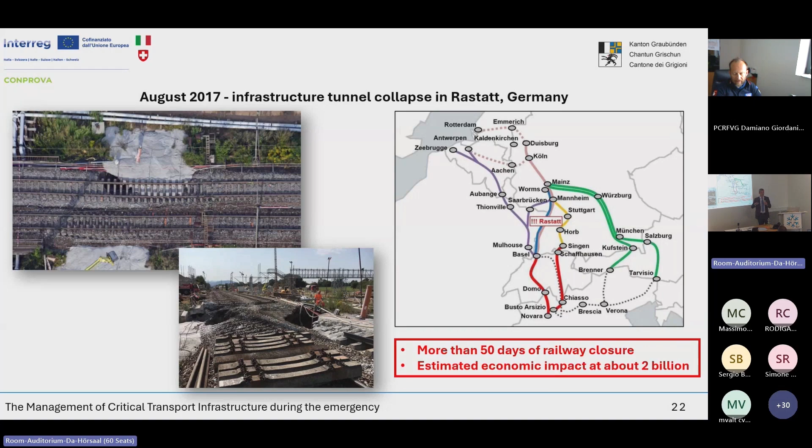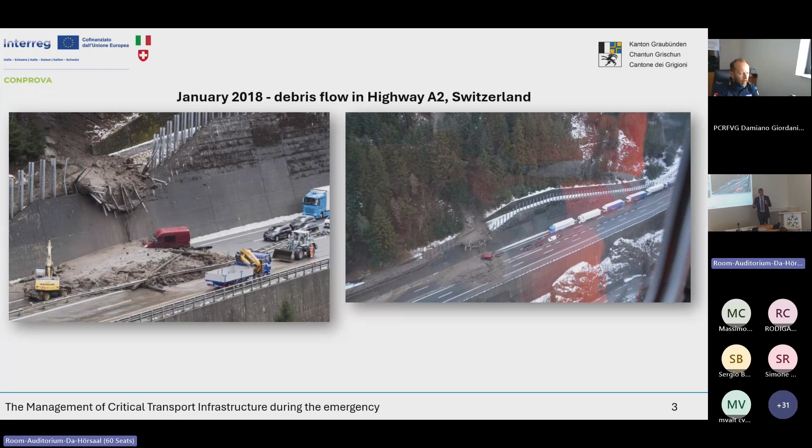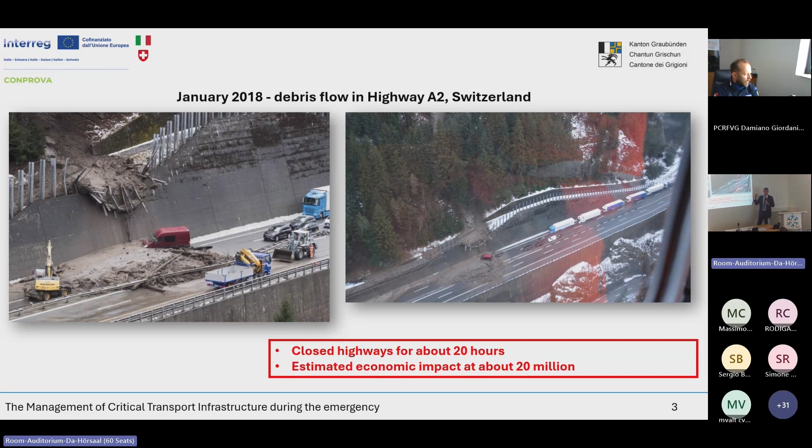Then we have another event that happened in Switzerland, not in Canton Grigioni, but on the A2, which is the backbone of Switzerland. A debris flow happened on the highway, and also in this case the consequences are not limited to the section where the event occurred. The highway was closed for more or less 20 hours, but we had larger social impacts amounting to about 20 million, just to manage mobility in the zone.

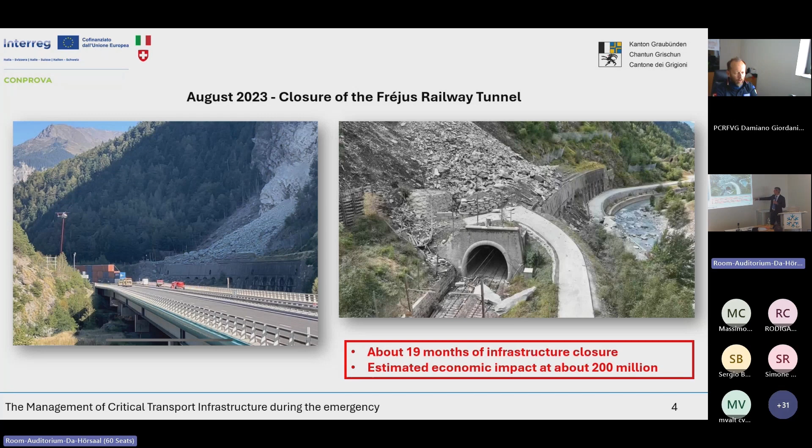We have another event that happened in 2023 regarding the Fréjus railway tunnel, which you can see in the image. Also in this case, this is an important corridor between Italy and France. The closure was more or less 19 months, and if we consider the economic effects between the two countries, they amount to about 200 million. The last example is again in Switzerland, regarding the Gotthard Base Tunnel.

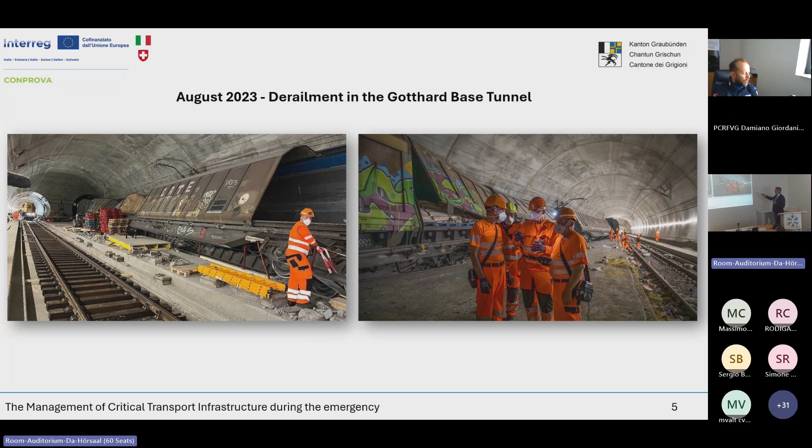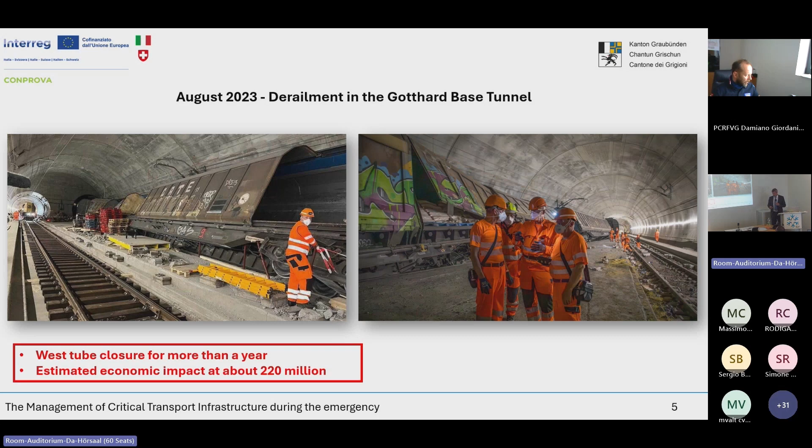After a derailment of the train, there was closure of the west tube for more than a year. So not only natural events - this is a non-natural, man-made, anthropic event. But also in this case, the Gotthard Tunnel represents a very important corridor in Europe for passenger and freight transport, and you can see the impact was about 220 million. So this is just an example to understand how important it is to study the possible effects linked and related to transportation infrastructure.

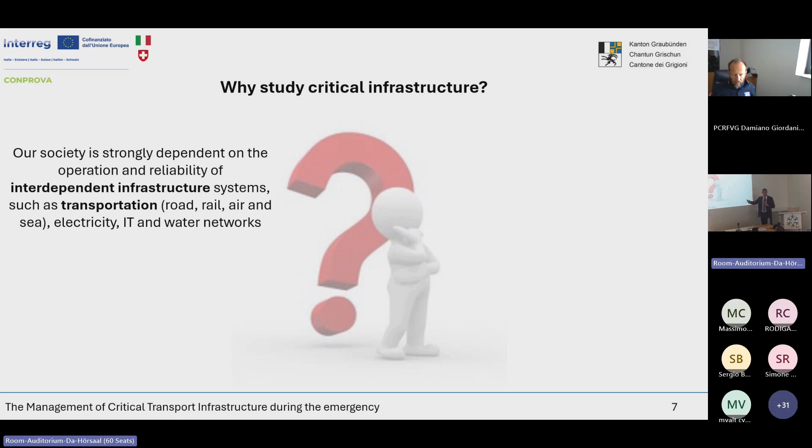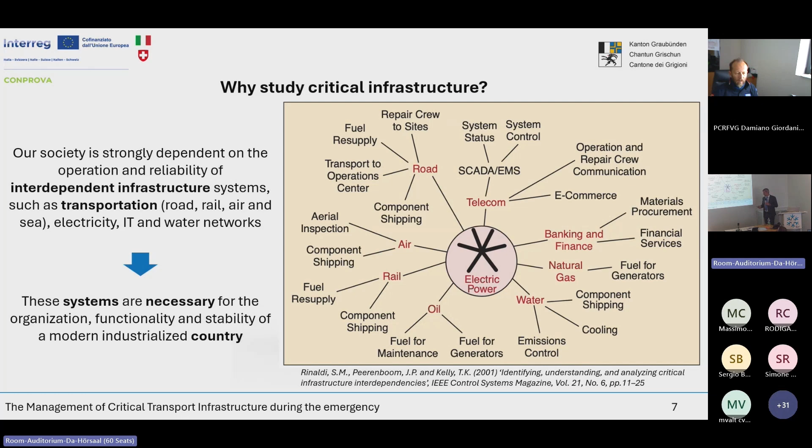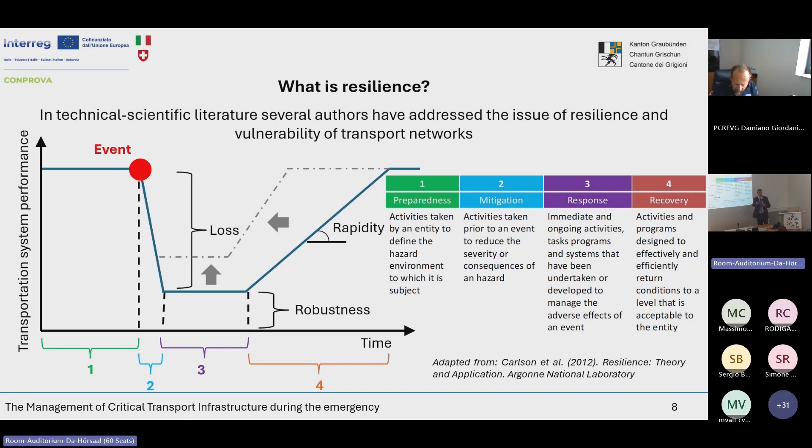Just 4 questions to understand what is behind resilience and emergency management. First of all, what can happen when a relevant event occurs in a given area? What are the socioeconomic impacts or effects, taking into account the events I presented before? Who manages a relevant event? And finally, what could happen if we are talking about a cross-border area?

Now it's important to underline that in this case, we need a decision support tool, instruments that can support the decision-making process in order to manage the transportation system in an easy way.

So the first question: we have, for instance, the activation of first responders, firefighters, sanitary rescuers, and so on, operators and managers like ANAS, agencies, institutions, prefectures, civil protection - it depends, but there are a lot of stakeholders involved. Implementation of plans and procedures that must be activated, taking into account the specific event, because each plan, each procedure is referred to a specific event.

And then we have to manage the mobility and transportation system, not only in the place where the event occurred, but also in a wider area, just to ensure, just to grant the mobility of goods, for instance.

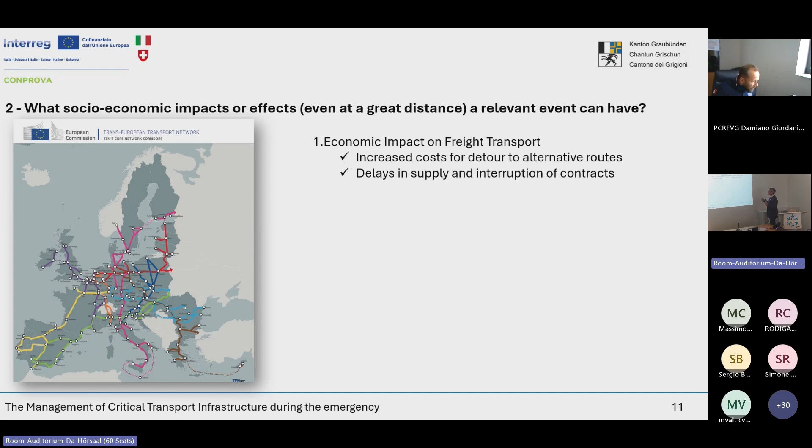Take into account, for instance, freight transport, the detour to alternative routes, delay in the supply chain, and so on. Also effects to passengers, travel time, alternative lines and routes if available. It depends on the situation, it depends on the topology of our network, obviously.

Environmental impacts, increased road traffic, for instance, increased CO2 emission or air pollution, depending on the link or the section that is disrupted. And then we have also indirect costs that are not easy to evaluate because it's not easy to monetize these costs.

But you can see that we have, for instance, impacts on local tourism, increasing accidents due to alternative routes, and so on. So all these impacts are very important when we have to consider that there is an event here, but the consequences are not only related to the place where the event occurred, but also to a wider area, as I said before.

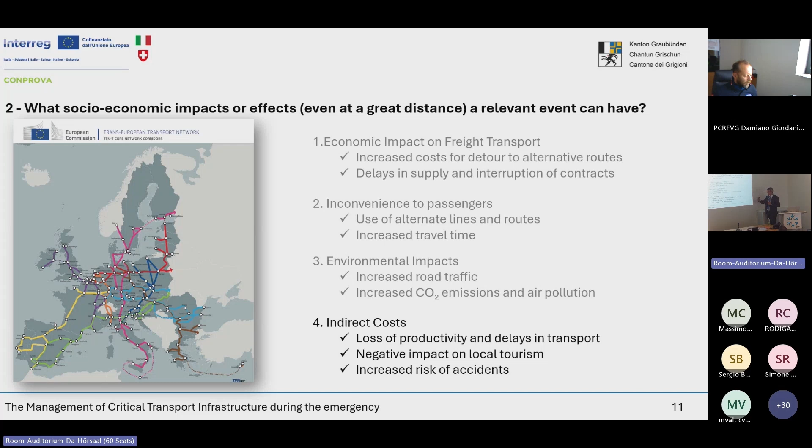What are the subjects, what are the stakeholders involved? We have, for instance, firefighters, first responders, sanitary experts, police, and so on. We have agencies, institutions, operators, managers, and so on. And it's very important, the relationship among all the subjects involved.

Because, okay, we have to speak the same language, Italian, English, whatever you want, but we have to have in mind a clear idea about the activation of the procedures.

And finally, the last one: if we are working in a cross-border area, we have many stakeholders involved, as we said before, obviously, but in some cases we have different rules and processes due to the 2 or 3 countries involved. It depends on the configuration of the system under investigation.

Then we have prolonged impacts and effects on the 2 or 3 countries, as we said before, in a wider area. And the point is, we want to try to merge and share resources just to reduce the intervention time and to improve and increase the possibility to reduce the effect. So we want to put all the resources on the table and work together to cope with the event.

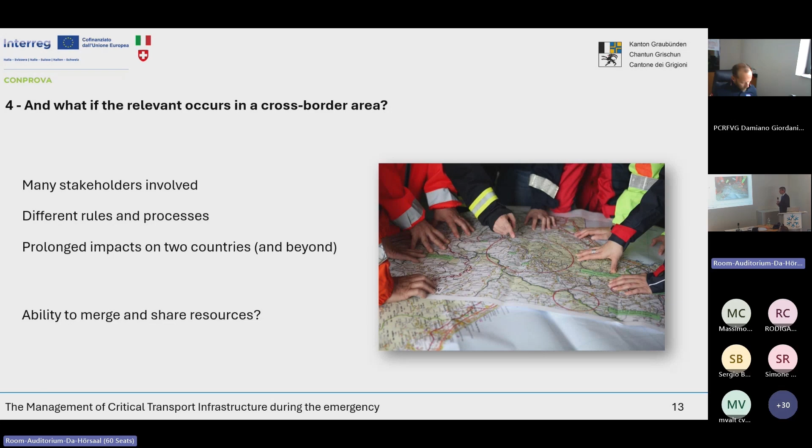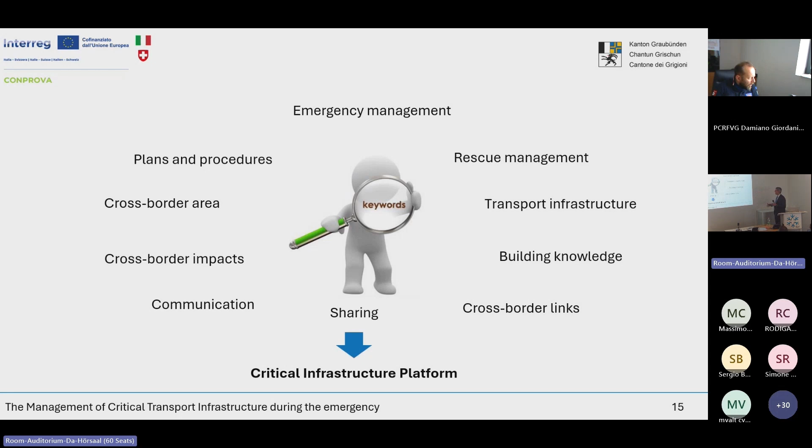We can say something about the possible solution in terms of tools, the useful and suitable tool that can be used to manage an event. The critical infrastructure platform can be a possible tool. In this slide you can see some keywords I mentioned before, just to understand what we mean when we talk about resilience, emergency management, transportation, effects, impact, and so on. The idea is that all these keywords can be put inside a critical infrastructure platform.

The platform comes from the previous Interreg project, the resilience of cross-border critical infrastructure. That was a project between Regione Lombardia and Canton Ticino, the north of Regione Lombardia and the south of Canton Ticino. The partners involved were Regione Lombardia, Polizia Cantonale, Dipartimento del Territorio, Politecnico di Milano, and SUPSI.

The project ended more or less one year ago, and you can see the main important data of the project. So what is the heritage of this project? We want to take the platform that is already in operation, and we want to boost and improve it, taking into account the specific needs within the CONPROVA project.

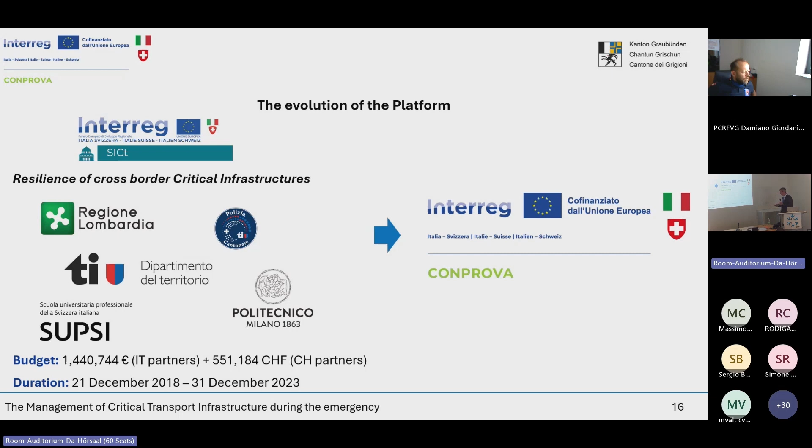So in this way we start from what we have done in the previous project, and then we will improve some specific tools. This is the platform that is already in operation, then you can try to assess and so on. For instance, we are now upgrading the transportation network - you can see here the SICt project road network in gray.

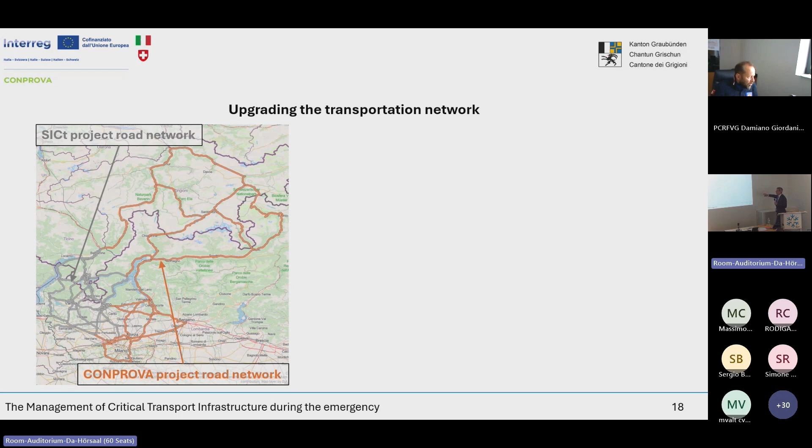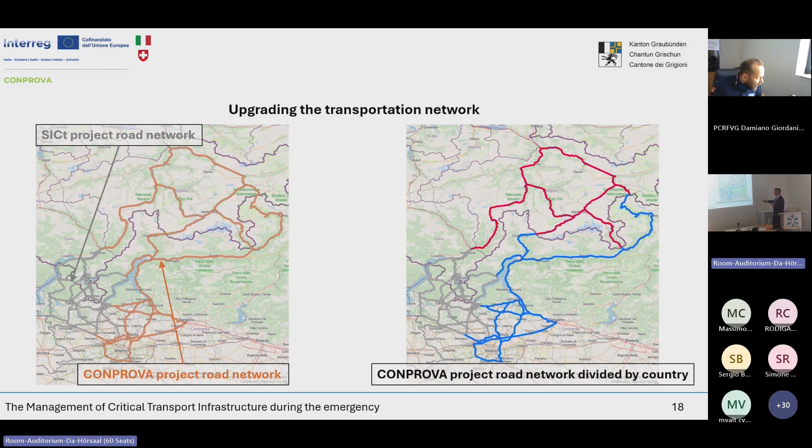The same approach will be used also for rail transportation. Now we are starting by upgrading the road transport, and then we will upgrade the rail transportation as well.

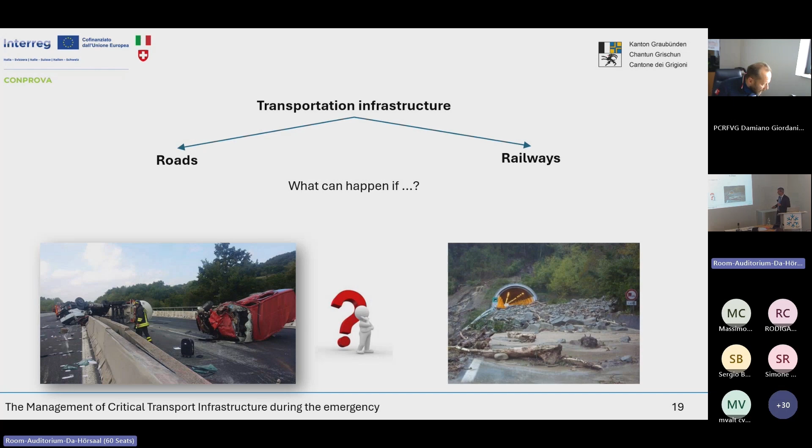What about transportation infrastructure? As I said before, we have to consider road transport and rail transport. The point is what can happen - what are the possible consequences after a big event, after a major event. We can consider on one end events caused by the transport system itself, in which the source of risk is within the transport system - road accidents, rail accidents, dangerous goods transport, for instance.

And on the other side, events in which the source is external to the transportation system, such as natural hazard, that we discussed before. But the effects are also within the transportation system itself.

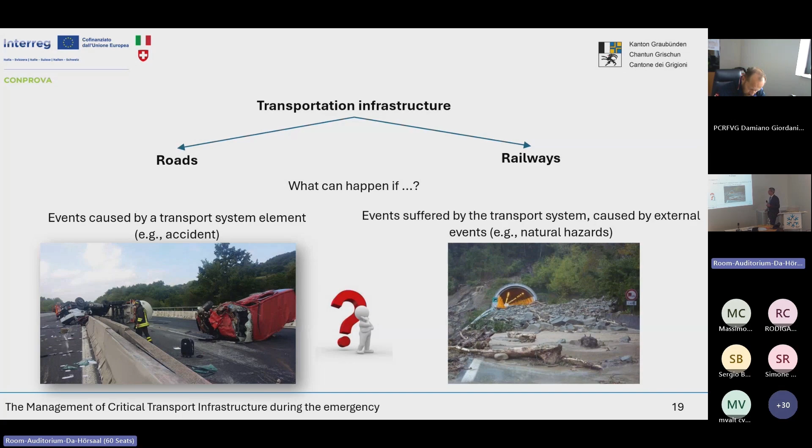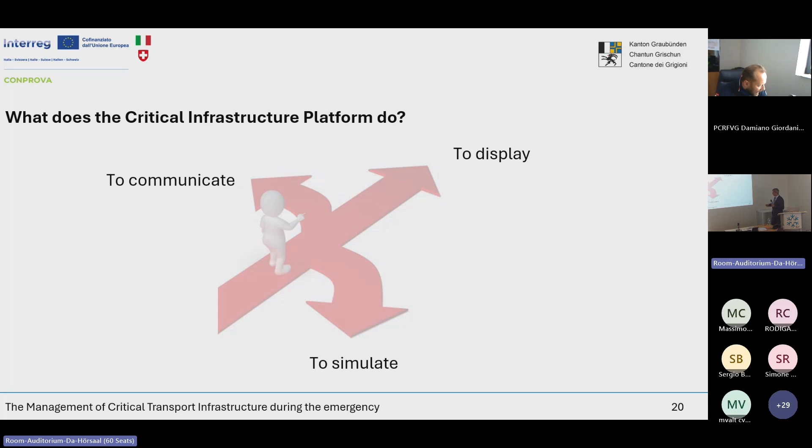I want to underline an important issue behind the platform: it is a starting point, meaning it's not a static platform, but always in evolution, because we want to satisfy the specific needs that will arise from stakeholders. So the idea is, now we have specific resources and time to develop the platform, but in the future it will also be developed by taking into account specific needs.

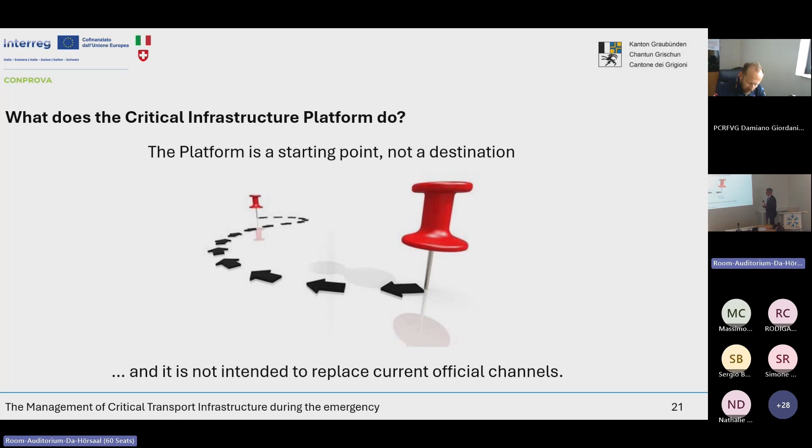We don't want to replace the current and official channels within each stakeholder. So firefighters will use specific channels, police will use specific channels, but the critical infrastructure platform can merge all these channels and try to make communication easier than using the phone or other tools.

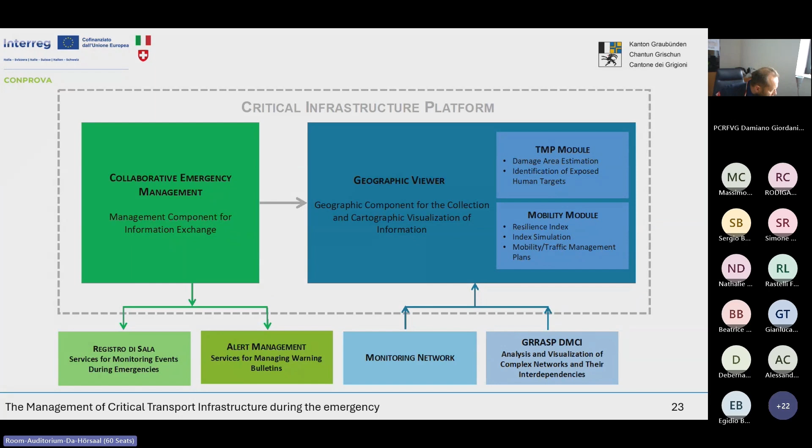The two modules are already in operation, and you can see some examples in terms of cameras, monitoring network, alerts, and so on.

We can see something about the collaborative emergency management, in which we have, for instance, the alerts. We have a specific tool that can support the management of alerts, so the user can put in some data, and this data will be shared with other subjects.

Then we have the events, in which there is an emergency that can affect a critical infrastructure, a transportation infrastructure, road or rail. We have to put in some information about what happens, and this information will be shared among the subjects involved in the situation - first responders, operators, prefectures, civil protection, and so on.

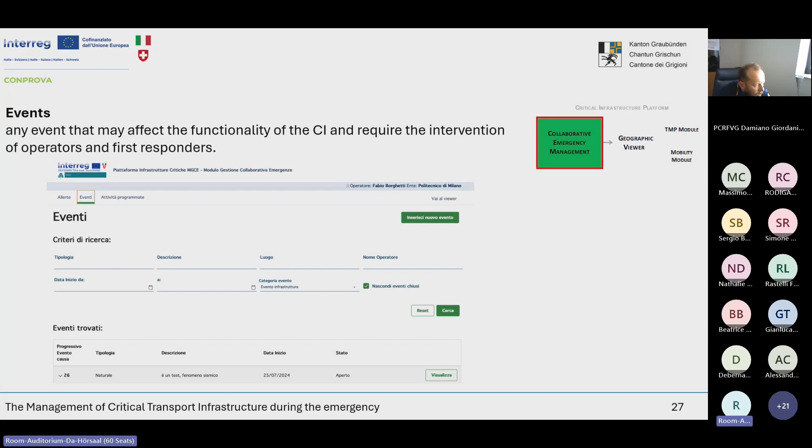Then we have, for instance, scheduled activities, in which there is no emergency situation, but for instance I have to close a road section or a tunnel for maintenance.

So it's important to understand this information before the event, just to organize alternative routes. For instance, this part was very, very important in the previous project, in which there was the border between Italy and Switzerland. When the border was closed, for several reasons, it's important to have an idea when the border is closed, because Italy must manage the traffic and also Switzerland must manage the traffic. Italy must manage the traffic starting from the south of Lombardy region, and Switzerland must manage the traffic starting from Zurich node.

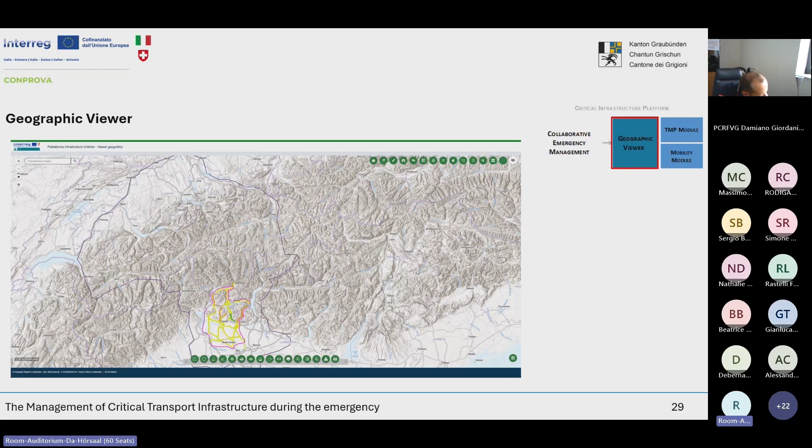Okay, so in this way, the border between Italy and Switzerland is very important, also if there is no emergency situation. Then we have the geographic viewer, in which we have a lot of possible tools, and in particular, we have two bars. In the lower part, we have a bar that is suitable to show something. So there are specific widgets that can help the user to show something, starting from the camera, alerts, maps, and so on, that are in the platform.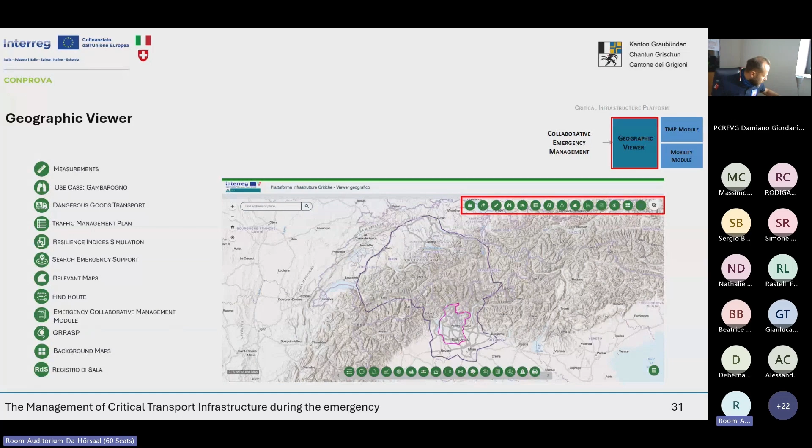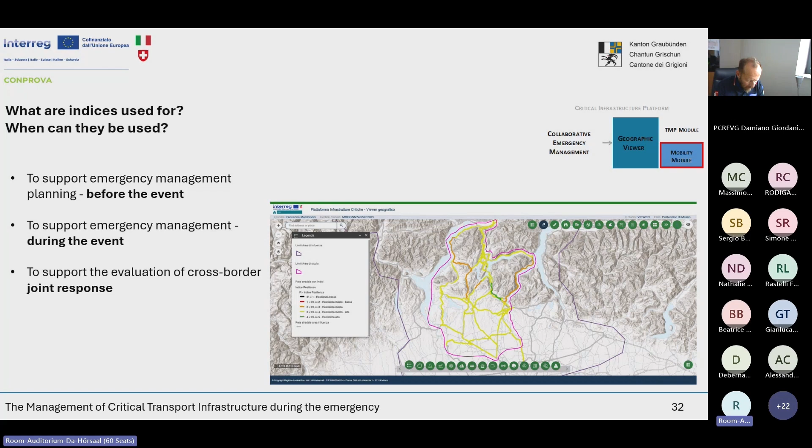And then in the upper part, there is another bar with other tools that are able to simulate something. So with these tools, the user can simulate something on the network and understand the behavior of the road and rail network during an event. We calculated also specific resilience indices on the rail and the road network, just to understand the behavior of the network during an event, and in particular before and during the joint response of the event. We can see how these indices are calculated, but I think we have not enough time now to make a deeper analysis, but if you are interested, maybe I can explain later.

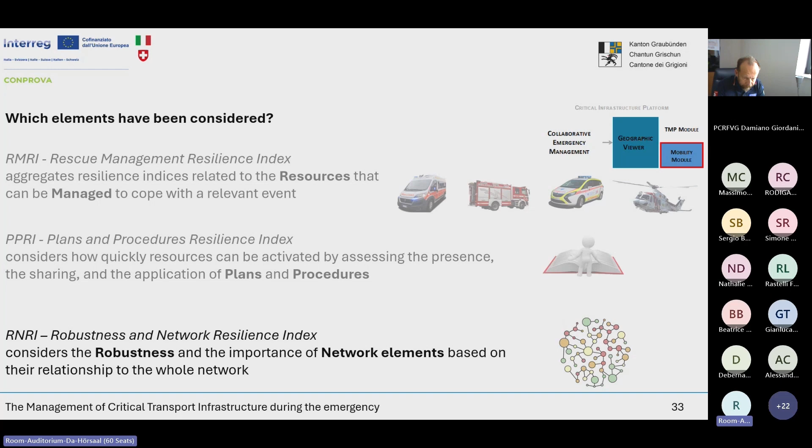We mapped also the possible resources that can be activated during an emergency, starting from the procedures and plans that I said before. So there is a map, and the map can be activated by the user just to understand where these resources are located and to estimate the intervention time when there is a big event on the map.

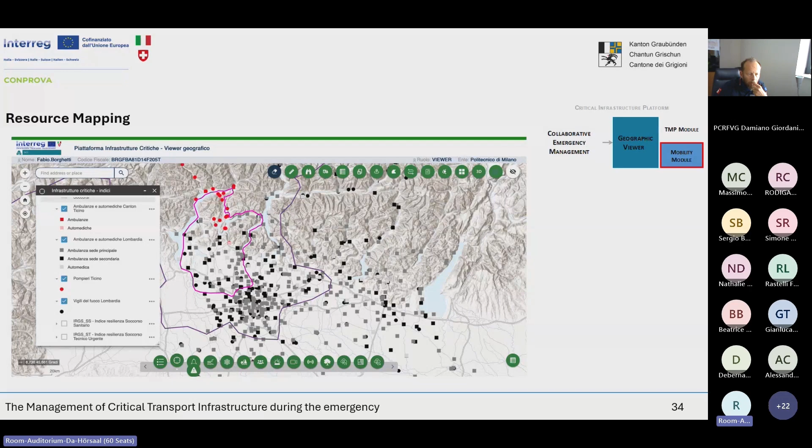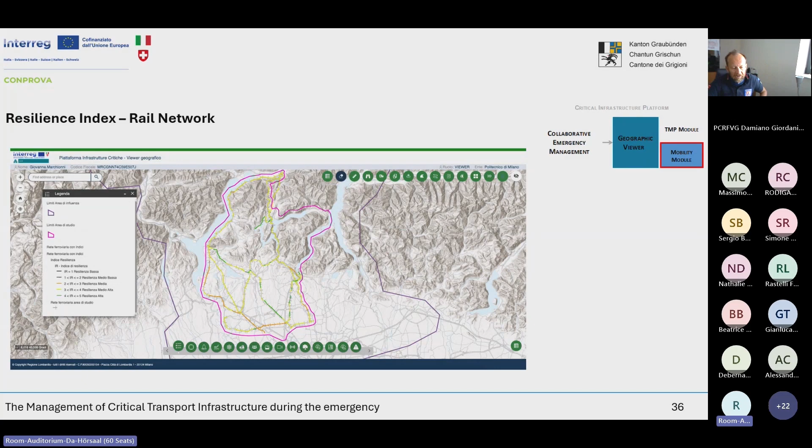Here there is a typical output of the indices. It is an index related to the road network. We used colors in which green represents a good situation. Then we have yellow, orange, red, and dark with the bad situation in terms of resilience. And then the same approach was done also for rail transportation, in which we use the same colors to classify the network. Then there is another important tool that can be useful to manage the mobility of passenger and freight transport during an emergency.

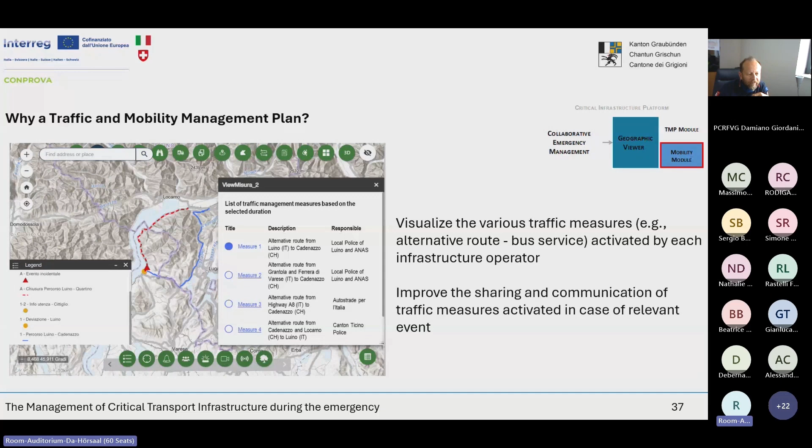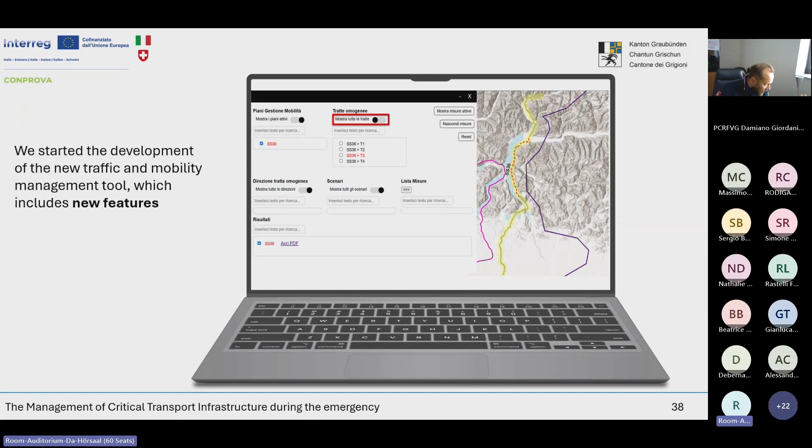And you can see that there are a lot of possibilities for the user to switch on, switch off alternative routes, and then the user can see what the alternative routes are in case of a disruption of road sections or rail sections. And this can be useful also to share the information with the other subjects involved when there is a disruption in a specific route. And now we are going on with this tool, and we are improving this tool, adding new features. So it's important also to consider the new specific needs within the CONPROVA project.

There is a last tool that is referred to dangerous goods transport. It is a typical event that can affect the transportation system. It is a man-made event, but generally it is a typical event because it requires more time to be solved. And it means that the closure of the infrastructure, road or rail infrastructure, will be prolonged over time. So the tool is able to make some evaluation in terms of the possible damage area, taking into account the scenario. And in particular, the tool allows to evaluate what are the possible targets within the area.

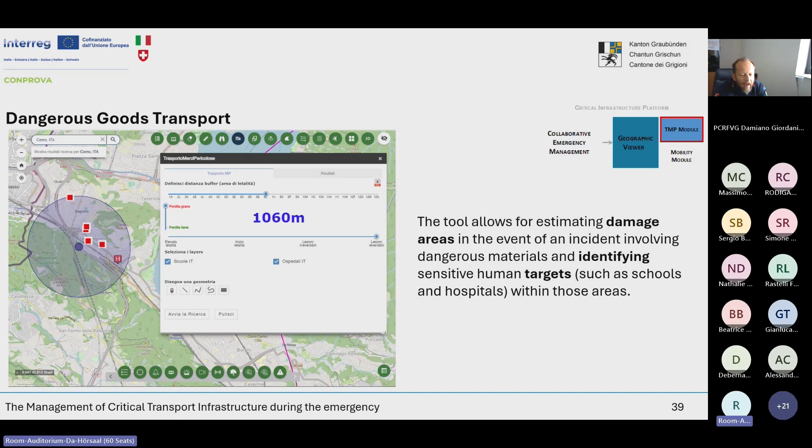For instance, schools, hospitals, commercial centers, and so on, and how to reach this area for the rescuers, and how to evacuate this area if we have, for instance, schools, hospitals, or other points of interest or elements that must be evacuated. So this is another important tool that is already in operation inside the platform.

So it's important to start from the causes that can affect our system and take into account the 4 phases of resilience. We want to try to provide solutions to simplify the emergency management that can affect the transportation network.